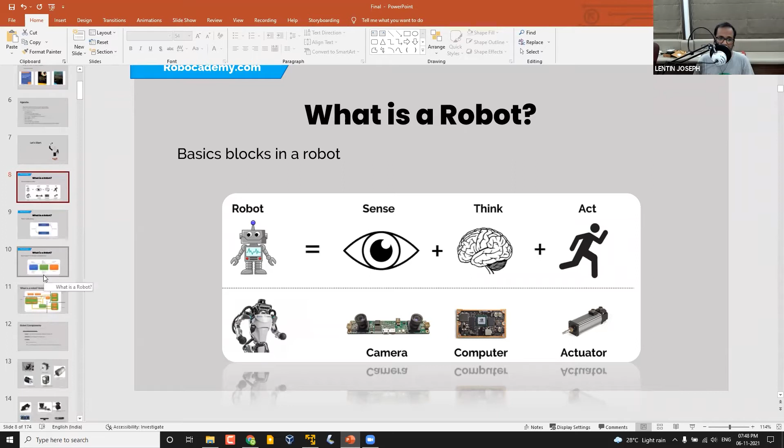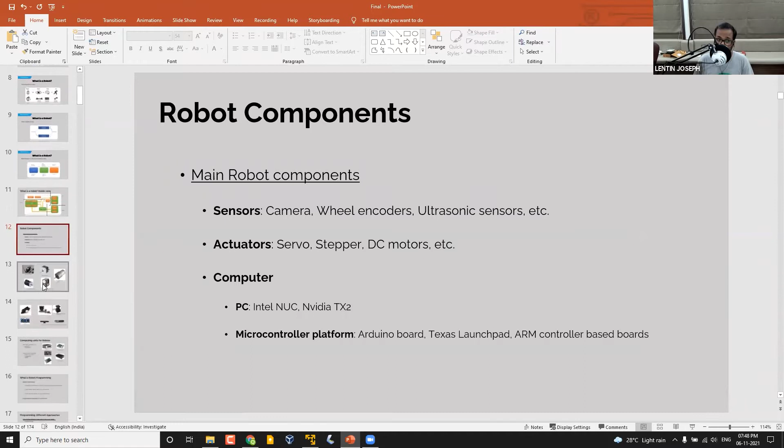Then I showed some very basic examples of the sense, think, and act loop using an obstacle avoidance robot. Then we discussed various components of a robot. These are not very deep topics — it's designed for absolute beginners. I didn't discuss any math or anything that needs more time. So this is a very basic idea.

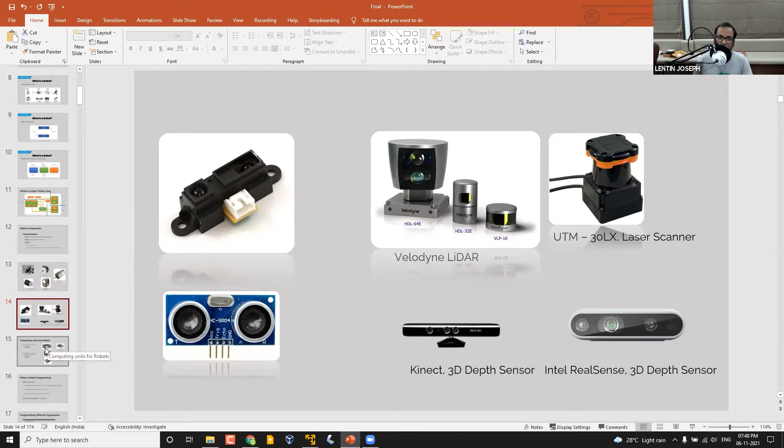And these are some of the components, like actuators, sensors, and computers. And I'll say in humans, the most differentiating factor is our intelligence — how we use it, that makes the difference, right? Maybe those who have the same IQ are using it better than us. So that's actually making us different, right? So in robotics, or in a robot, that is the differentiating factor.

What is the program running on the robot that makes it intelligent? If you run a basic program on a complex robot, it will only work in a very basic format. But if we put complex or very intelligent software in a complex robot, it will work intelligently. So the main stuff in robots is in the software. Other things are important too, but I will say the most important part is in the software.

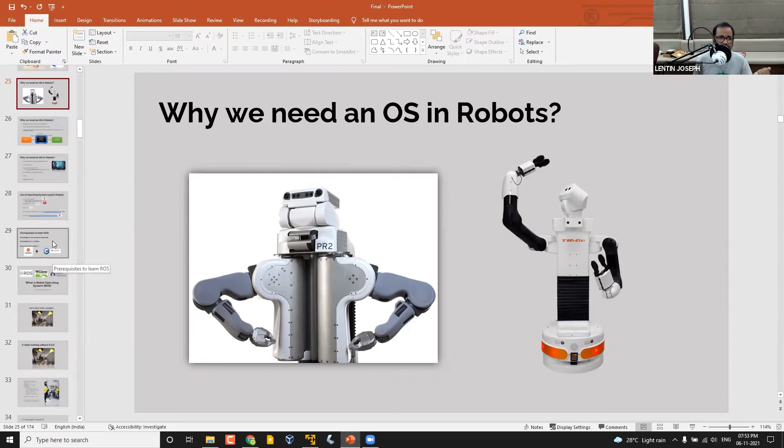So then we just started with ROS. We have also seen what different operating systems we use in robots, mainly Linux-based. And I mentioned that ROS is for programming robots - it's a software framework or software tool to create applications for robots.

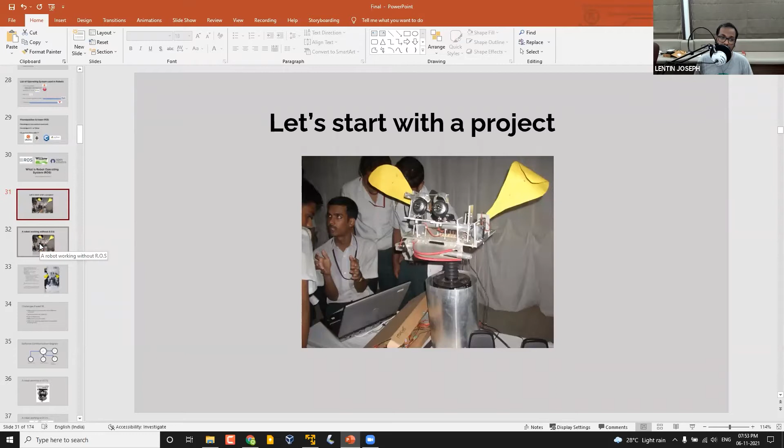Then we started with ROS. Then I showed my bachelor's project - this is how I started with robotics. It's a social robot, but I didn't use ROS at that time. I was not aware; it was happening in 2010 actually. But I implemented a similar setup - kind of a message passing interface using server and client. So that is actually where we use ROS for communication, which I will discuss.

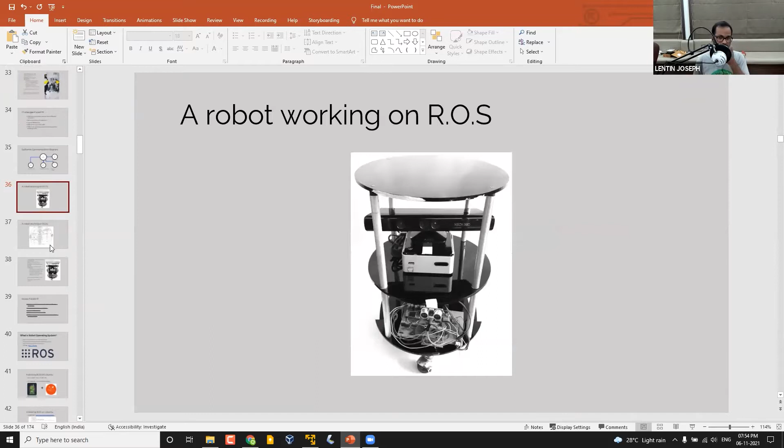So this was a start. Then I also showed a project that is using ROS, working using ROS. Then we started with ROS.

ROS stands for Robot Operating System, so you may think it's a real operating system, but basically it's not. We are calling it a meta operating system. There are many definitions for ROS - we can call it a meta operating system, a software tool, a software framework, or a communication middleware. All these definitions are suitable for ROS.

And I have shown the official website of ROS. This is the new website of ROS, so you can have a look at this website. I will be addressing your comments after some time.

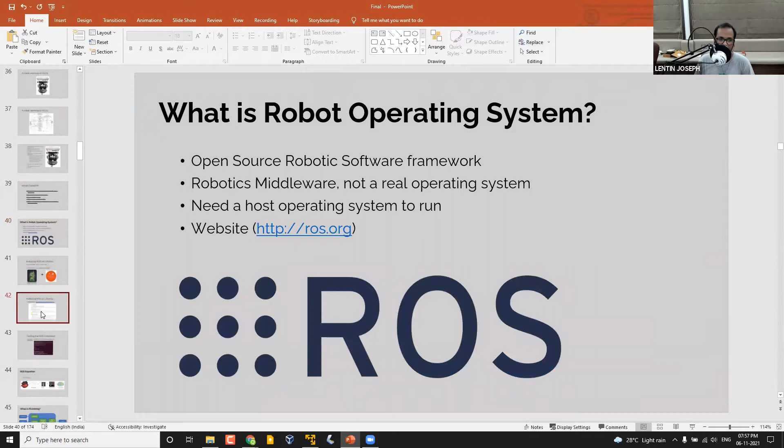Then we have discussed the basics of ROS. So from here, we will switch into our today's topic. ROS is basically having four main parts: one is the plumbing, second is tools and capabilities, and ecosystem. So you will obviously have confusion, right? I can explain these things, and today's topic is actually one of the topics from the capabilities. So we can just check what these four things are. First we can check what is plumbing.

I just want to ask you a question: how many of you created a robot using a Raspberry Pi, or with a laptop? A robot which is having a computer like Raspberry Pi or a laptop or anything. How many of you? With Raspberry Pi you have that. Great. Anyone? Okay, yes, some of you created. Good. Yes, okay, that's great. I didn't expect this much of people. So some of you have created robots using Arduino. That's also good.

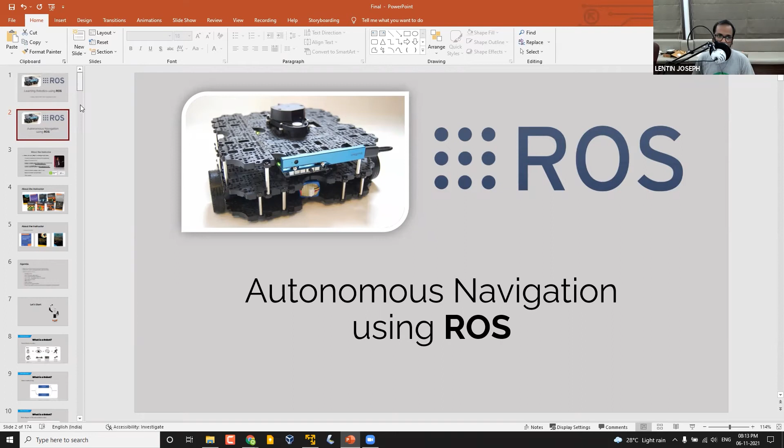One of the main reasons why people choose ROS is because of the capabilities. So what are capabilities? That is what I'm planning to focus on in this session. Capabilities are like - we already saw that we can write multiple nodes to accomplish a big task. The capabilities are some big tasks which are accomplished by some existing nodes already written by some people. There are some existing programs there, and we can simply take that program and fine-tune it, then we can do a big task. If you have confusion, I can show you different capabilities of ROS - this is the main reason people think of taking ROS for their project.

For example, if you want to implement autonomous navigation in robots - autonomous navigation, I already explained, going from A to B without any manual intervention - it can avoid obstacles automatically like this. You can see this video, right? Yesterday I showed this video, so this is the topic for today - we are planning to discuss about it. This is a very important and popular topic in ROS, and a lot of people, including me, are mainly interested in navigation.

Navigation algorithms in robotics - I am very passionate in working with these kind of things.

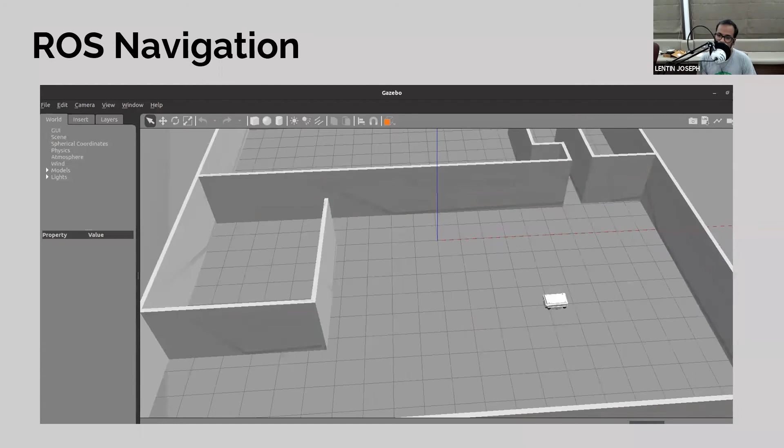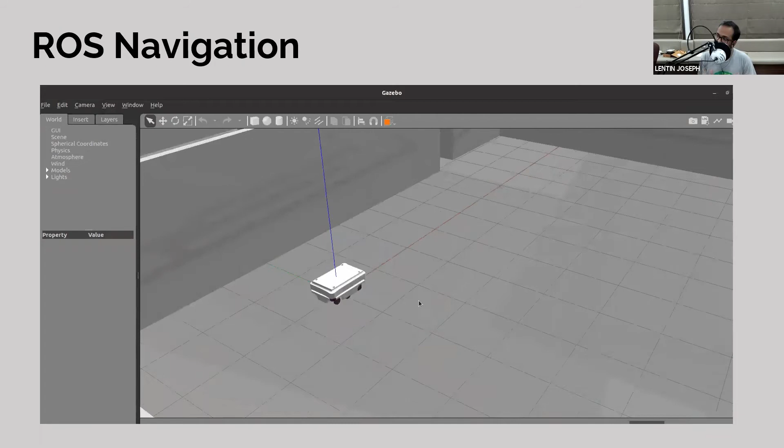Using ROS capabilities, you don't need to write any code. You can simply take the existing set of programs, or packages. Packages is a word we use in ROS - it's a collection of programs, and a collection of packages is called a stack. So navigation, in ROS there is a thing called the navigation stack, which is a collection of ROS packages that helps the robot do autonomous navigation without much programming. It's all about fine tuning the parameters, and you can do this kind of project both in simulation and on the real robot.

So this is the topic for today - one of the very popular capabilities in ROS. Other capabilities are manipulation, pick and place - taking an object from one place to another. You can easily implement pick and place routines. If you've heard about inverse kinematics, forward kinematics, motion planning - all these are available in ROS in the form of packages. You can simply take that, then configure it. It's not programming, it's configuring - simply adjusting the parameters, and then it's ready to go.

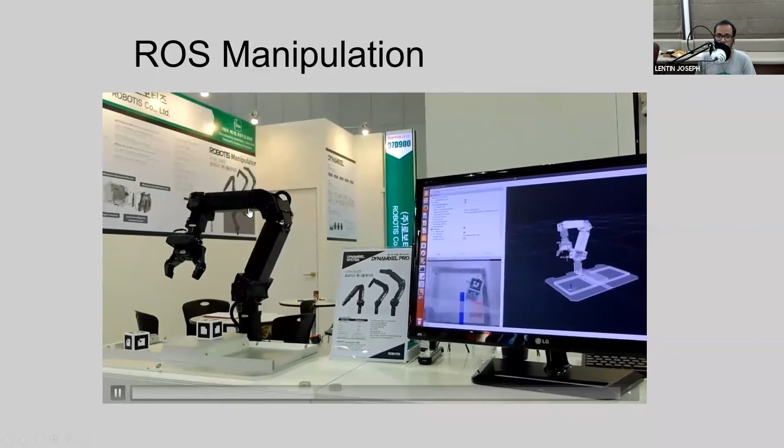So you are seeing a real robot demo. You can work with simulation and also real robot. The third capability is perception.

I think you heard about the self-driving car - it's a robotic car, it's a robot actually. There is a sensor on top of the car called a LiDAR, a 3D LiDAR. This demo is a mapping demo using self-driving car LiDAR data. So this kind of mapping and navigation can be implemented in your robot without much programming - I will say without any programming.

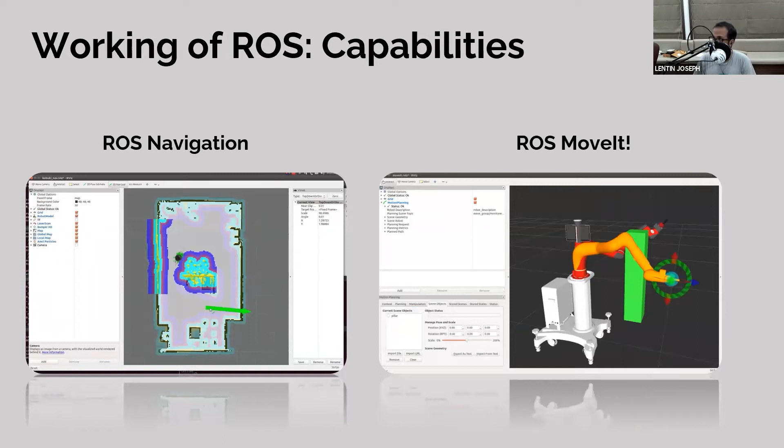So this is one of the attractive features in ROS - existing code that you can just reuse. There are many packages available in ROS, you can simply reuse the code. So let's dive into ROS navigation.

I'm just switching to a web-based tutorial now. I can give you a link first - I'm using the ROS website link, so you can also follow. I've put a link on the chat box - this is that link. You can take that, and this is the wiki page of the navigation stack that I mentioned.

Navigation stack - so what is a stack? It's a collection of packages. Here, navigation stack is a collection of packages in order to do autonomous navigation, so we can simply take and customize it for our robot. You can just see a comic here.

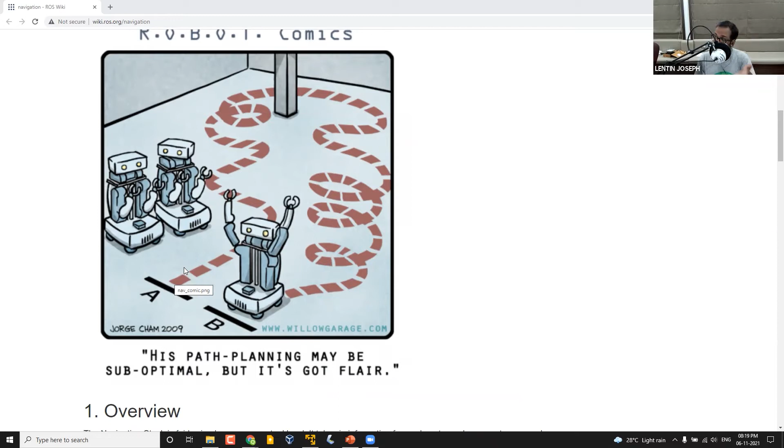The objective of this set of packages is mainly going from A to B. If there is an obstacle or anything, using the navigation stack the robot can avoid it using its sensors, and then it can reach the goal.

There is an interesting video attached to the same page, which is the official video of the navigation stack. It's somewhat old, but still relevant.

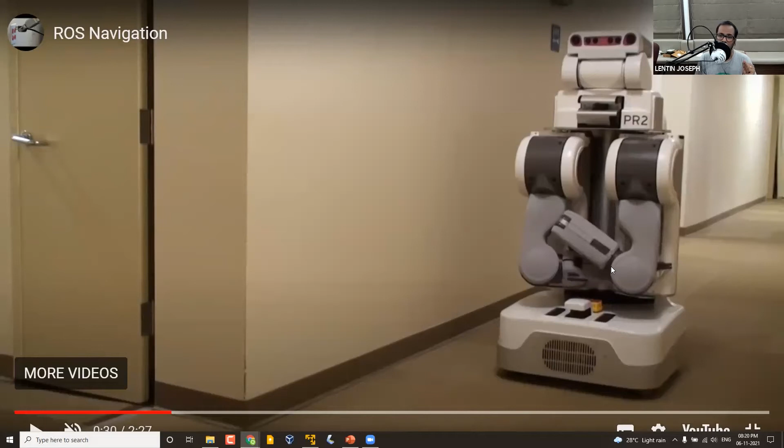You can see some of the things from the navigation stack - using the navigation stack, you can take the data from the LiDAR or laser scan. This robot is called PR2, one of the older robots. Actually, you can see a lot of demos using PR2 and ROS on YouTube.

So here the robot is moving based on the navigation stack. I'm just showing a demo first, then I will explain what the navigation stack is. So here you can see the robot - this is a visualization.

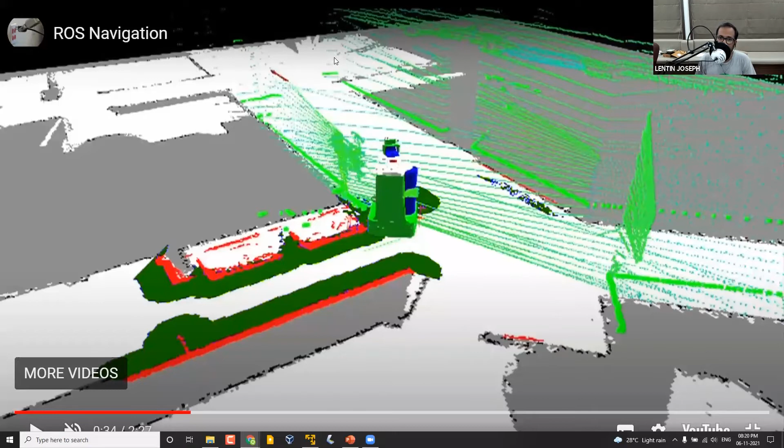Okay, this is a visualization, and you can see on the bottom there is a map. There is a map, and you can also see a LiDAR. Actually, you have seen in the chest there is a LiDAR, it's moving like this, right? So when the robot moves, you can see there is a red arrow here, right?

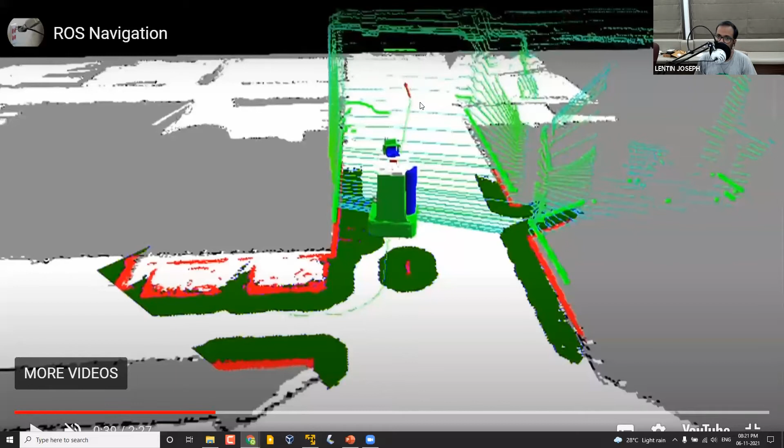That is the goal position that they have given. So the robot is actually planning a path, and it's avoiding these walls and reaching the goal, and this is obstacle avoidance. This feature is obstacle avoidance. It detected an obstacle, then immediately it stopped, then it rotated because it was confused about what happened. Then after that, it took a new position, a new route.

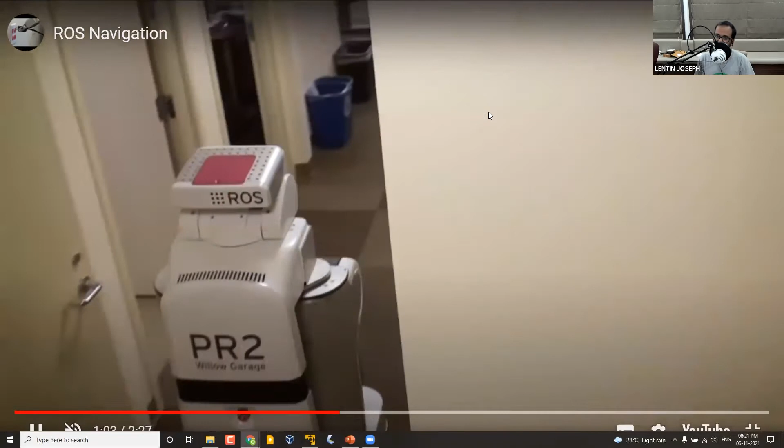So these are some interesting projects. There are many projects related to navigation on the web, and on YouTube also you can find many videos. So these are some of the primitive videos, but still it's good.

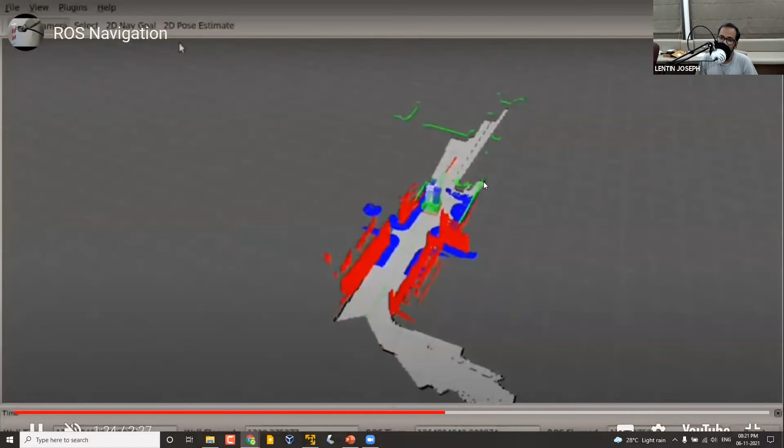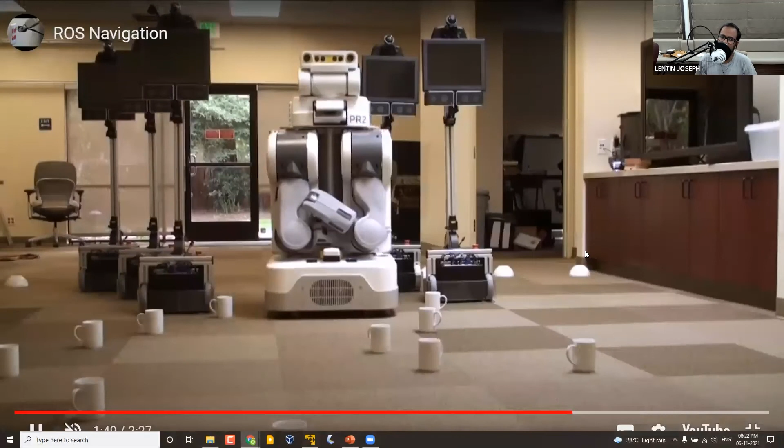So here you can see the robot is moving, and it's also creating a 3D map, and it's actually moving and also building a map. So kind of exploration. That also can be done using the navigation stack. Anything related to navigation can be accomplished using this set of packages called the navigation stack.

Basically, the ROS navigation stack is designed for 2D, meaning like in a plane, but we can fine tune it. We can tweak it for 3D as well, for aerial drones and all, we can use the navigation stack with some tweaking.

So this is a demo of the navigation stack, and then you can take this link, navigation stack setup. You can just take that. That actually shows what is inside the navigation stack and how the navigation stack works. So after discussing this, I will show you a simulation demo.

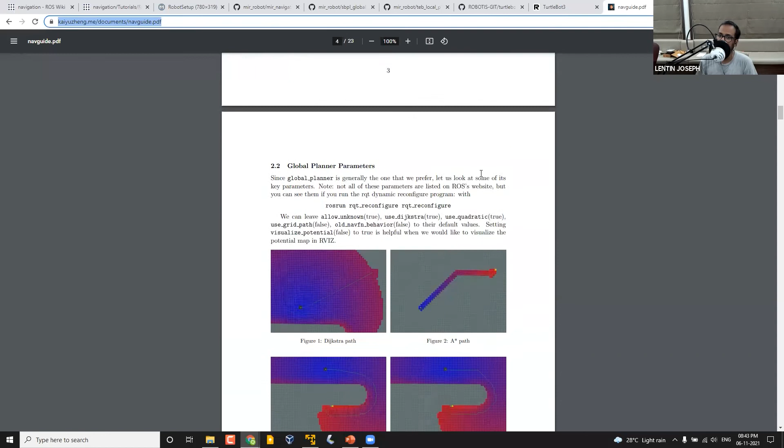Yeah, okay, so you can see that PDF, right? This is one of the simplest documents you can get from the web to fine tune these tons of parameters. Parameter fine tuning is not easy, it requires some experience. There are many parameters like move base parameters, some from the move base node, then costmap parameters, parameters of the global costmap. You have to fine tune all this. You can find the documentation of all these from the ROS Wiki.

For example, if you want to see the parameters of MoveBase, you can just click here and you can see the parameters from MoveBase - these are the parameters. You can see the ROS parameters. You can put in the MoveBase parameters - you can give the global planner, local planner, recovery behavior, all that stuff.

Okay, so it's not a simple topic. It needs a lot of learning. It will take some time to learn all this stuff, but I'm trying to give an abstract of what the ROS navigation stack is and how we can start with it. There are some books of mine that are also helpful, like the latest book, Mastering ROS for Robotics Programming, 3rd edition, which explains it in detail.

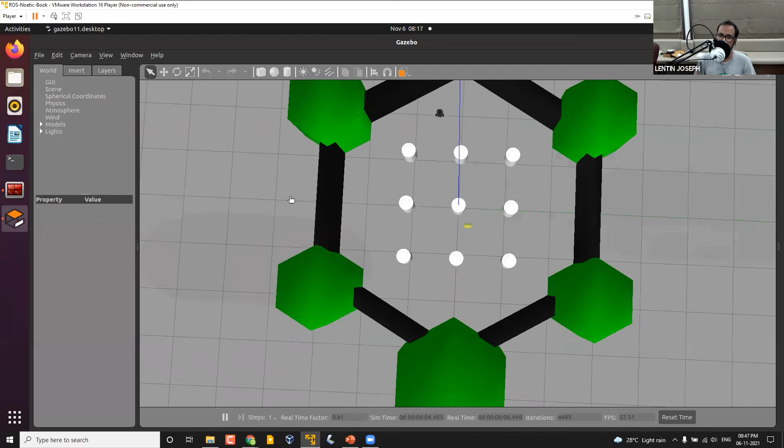Also sir, I have right now Pluto X, Pluto 1.2. I have installed the package for camera calibration and for its command. I am trying to do SLAM using monocular SLAM, but I'm stuck there also. After getting the map, what will you suggest for autonomous navigation?

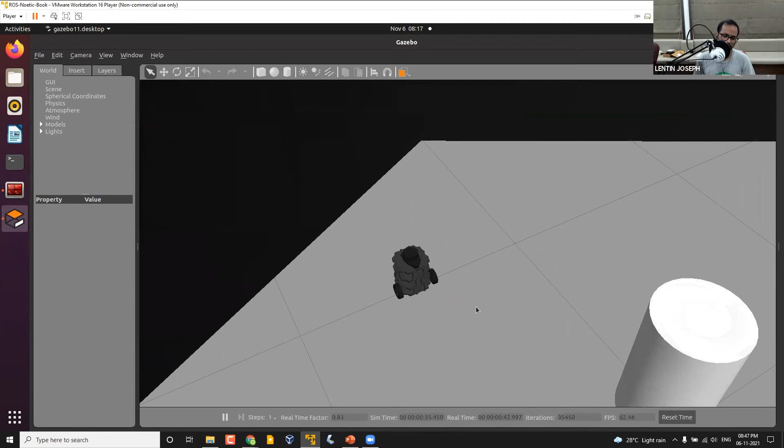Like what package? So did you check ORB SLAM? Yes, I checked, I have checked. But I guess I'm stuck between the topic name, I guess, but I'm working on it. ORB SLAM is actually good. I'm not saying it's perfect or accurate, but we can use the monocular cam to do the mapping.

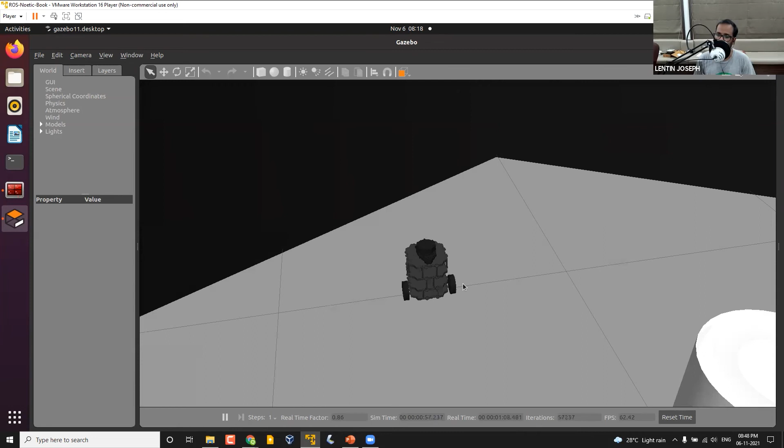But using that, or RTAB - did you try RTAB? No sir, RTAB I think is also a visual SLAM technique you can use. But for the ROS navigation stack, I think we need a map, a 2D map, and these sensors to navigate. But if you're not planning to work with the navigation stack, then there are other things like Hector mapping, but it may need laser scan, I guess. I think ORB or RTAB - there's one more thing I worked with - these will be helpful, but I'm not sure about the accuracy of the navigation. I'm not sure it's accurate, but working with the navigation stack will be accurate.

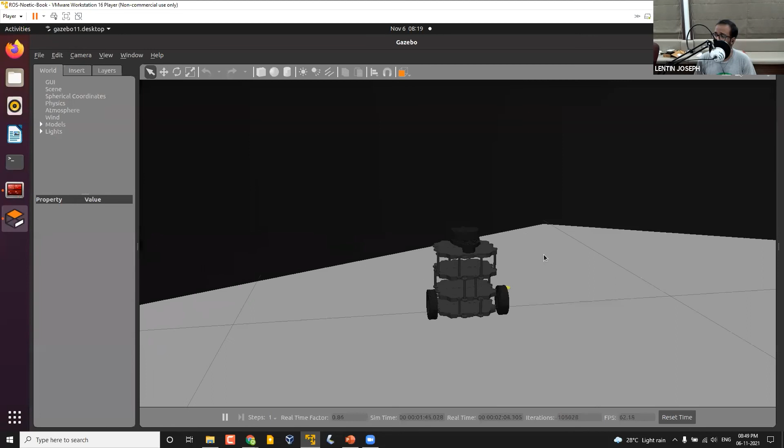But are you planning to connect any laser or something into the robot? Not yet sir, but if possible I will attach it. Since it is a drone, we need to take the weight into consideration. So in that case, I think there is a monocular SLAM from Technical University of Munich. There are many options, maybe I can share. It's actually an old package.

You can search for TUM ROS. It's for the Parrot drone, I think. Maybe I can share it, you can try that. It's actually using the monocular cam. I think that will be helpful. So there are many packages for doing this, but the accuracy is one issue. You can try - you can just iterate through some of these packages and then I think you can choose one from that.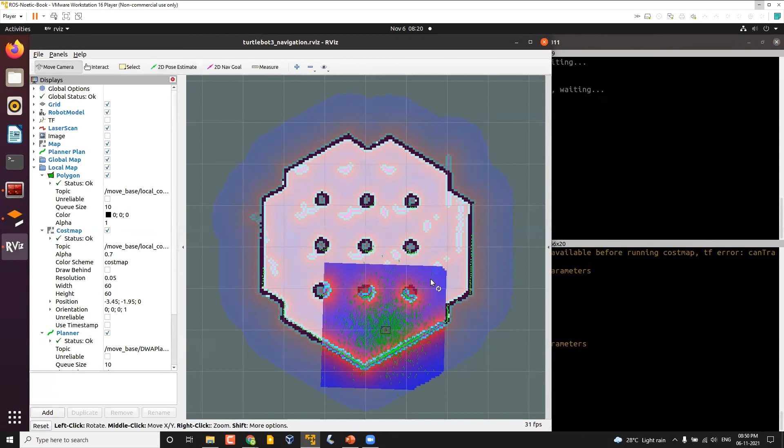Also sir, since we're talking about navigation - to calibrate this with a real robot, like in simulation we can easily do the navigation, but to do it on a real robot, how should we connect the nodes to the real robot actuator? In case of the navigation stack, if you're using the navigation stack, the only thing is that if you can provide these topics like ODOM, then TF, then the map, then the sensors, that is actually fine for working with the navigation stack.

If you want to compute the odometry, you should use the encoder data, or laser odometry, or visual odometry to get the odometry. This is actually important when you work with a real robot - you have to calculate the odometry value, that's one of the important parts. After getting the odometry, if you connect a laser scan, I think it's ready to go. There is not much work involved.

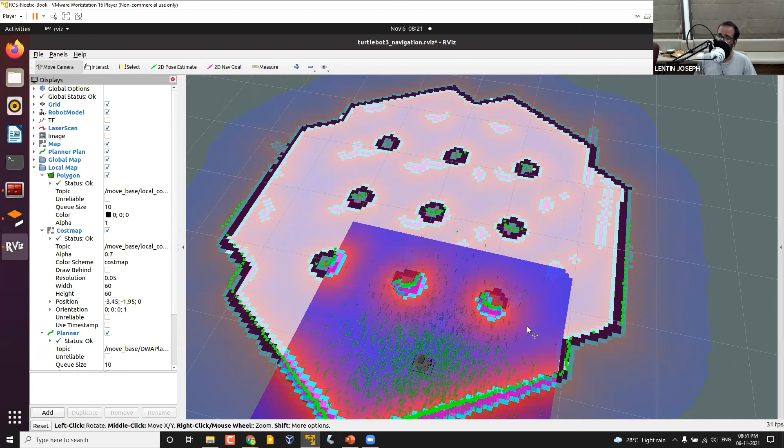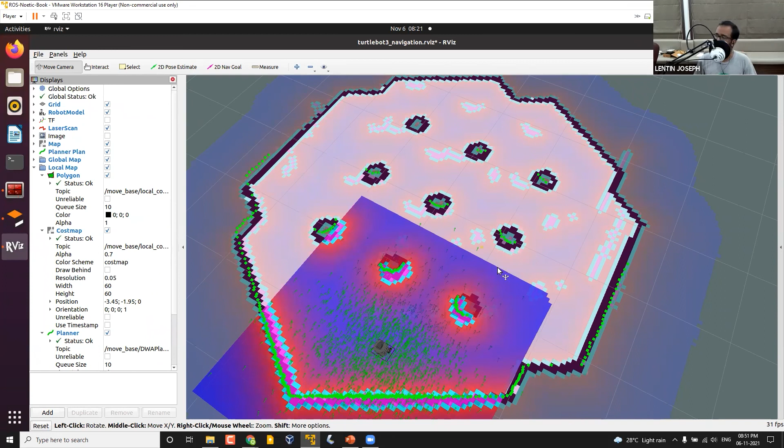But in order to read from the encoder, you have to connect an Arduino board into the robot. You can count the number of ticks from the encoder, then compute the odometry data, then send it into the ROS navigation stack. So there is some work involved, but I think I have sent the Turtlebot 3 and diffbot references, right?

I think the Turtlebot 3 is one of the references you can take to see how to proceed, and there are many other references. This is from one of my courses, and it's also mentioned in my book. I'm actually running a course in ROS called ROS Developer Learning Path. This is one of the projects that one of my team members did, and it's already included in my latest book. I think this will be a good reference for you to start with navigation stack, simulation, and then how to put it into actual hardware - how to integrate everything.

And also the Linorobot project, which is again from one of my friends. This project is very popular, and he also ported it into ROS 2. So these are the two projects that you can refer to.

Can you tell about the TF? What is the significance of it?

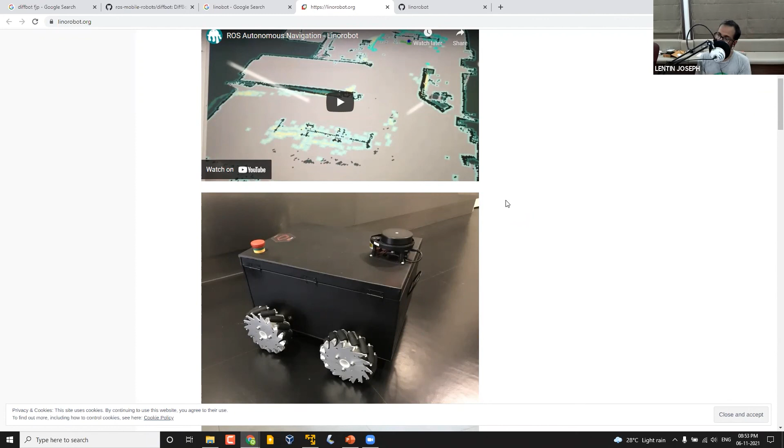TF is actually the transformation. If you take a robot, there are wheels, then there are sensors, right? Sensors may be mounted on the robot. So the TF is the transform from the base of the robot - from the base of the robot, what is the distance of the wheel, what is the orientation of the wheel, what is the height of the LiDAR mounted. All this stuff.

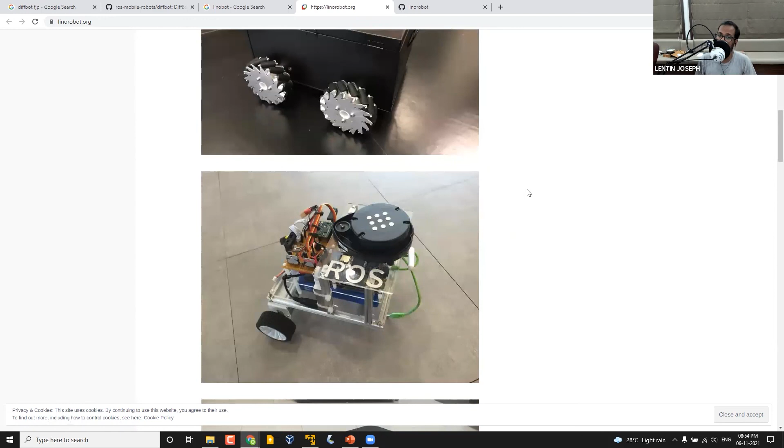That is actually TF, and the TF can be published by ourselves or using a robot model called URDF. In ROS, there is a thing called URDF, so you can use that also for publishing the transformation. It's not very difficult.

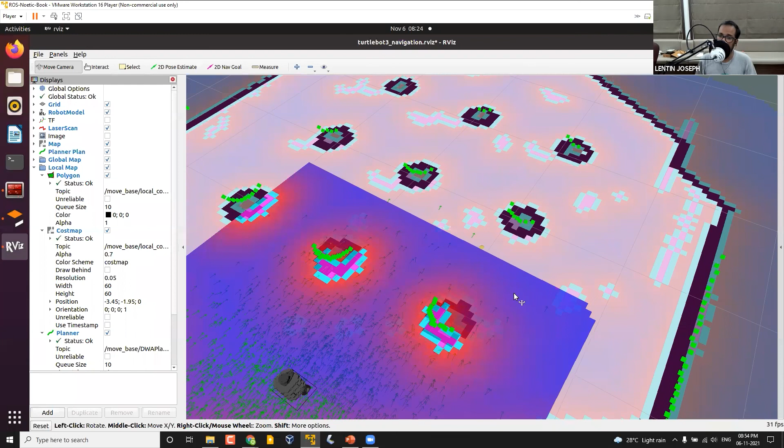These projects will be helpful to start working on some real robots. What I'm showing here is a simulation of a robot called Turtlebot 3. If you give a goal position like this, the robot is planning a path. This is happening not only in the simulation, you can implement the same in the actual hardware.

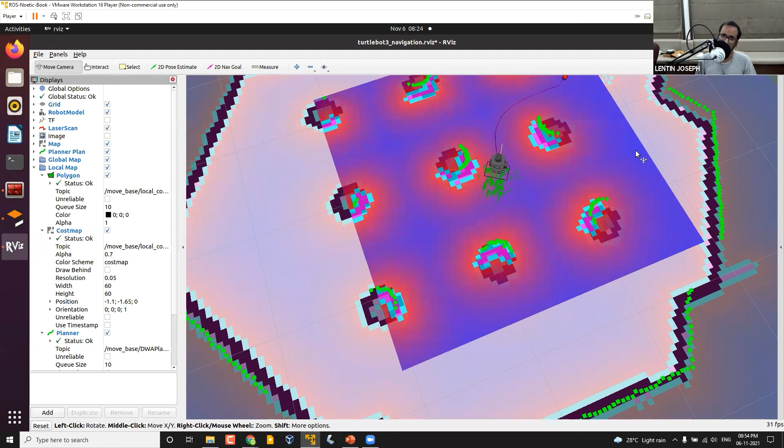I'm taking one more question - which ROS is more suitable for industrial deployment, ROS 1 or ROS 2? Again, a relevant question. ROS 1 currently is very stable. ROS 2 is actually product ready, but I will not say it is as stable as ROS 1. So it's actually a bit of a difficult choice, and it will be based on your application as well.

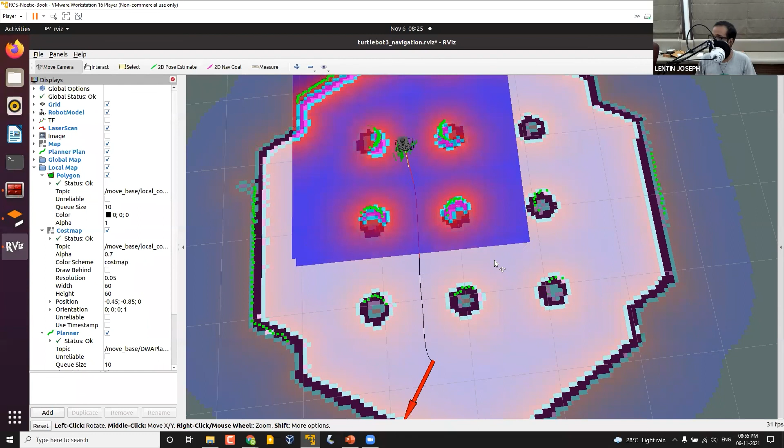If you are planning to do navigation or something, there is Navigation 2, for ROS 2. I will say it's much better. It's still in development, but it's in a good position, so you can rely on this nav stack now and develop.

But if you are planning to explore the entire possibility of ROS, like all the packages of ROS, then ROS 2 will not be an option, because the packages are still porting from ROS 1 to ROS 2. So it's actually a bit of a difficult decision, and it will depend on the applications that you are going to do.

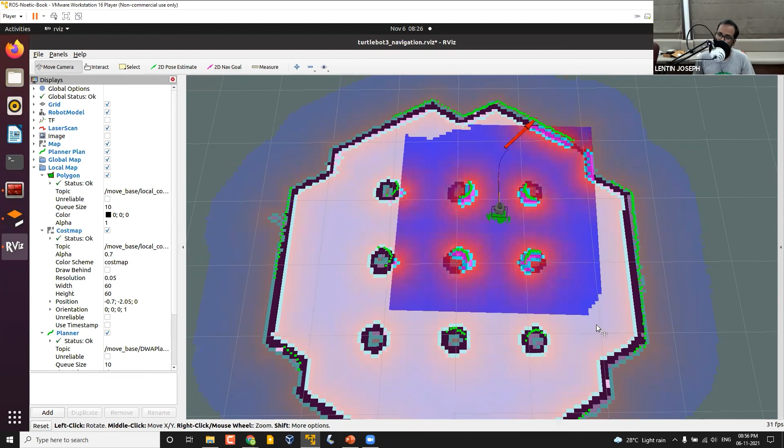But as per the design, I will say ROS 2 is for the product. ROS 1 is mainly for research, but it can be used for product with a lot of fine tuning. We are running out of time now.

Have you worked on unmanned surface robot boats? I have very little experience working with it in simulation. There are some ROS stacks available to work with boats. Then you know about omnidirectional robots with the navigation stack? Yes, omnidirectional - you can refer to the Linorobot project I have done, which has an omnidirectional robot as well.

What is the difference between TF message and odometry message? The odometry is actually publishing the current robot position. TF is the transform - meaning the position and orientation of a link of the robot with respect to one fixed frame. So it's all about the frame, like there will be a wheel frame, a sensor frame, and so on.

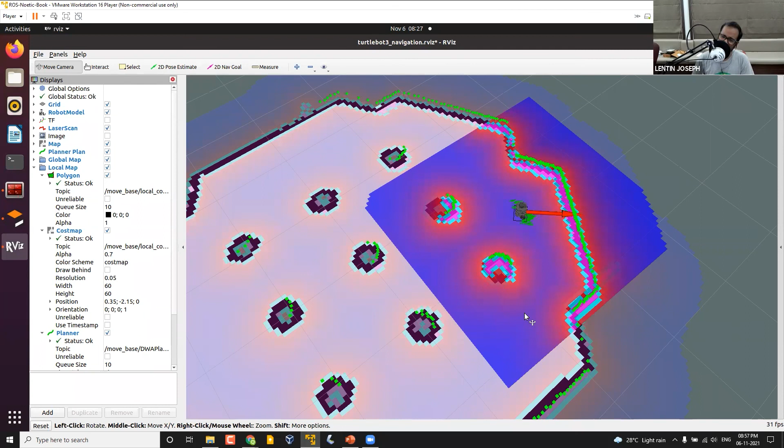I think it will take some time to digest all this stuff. It will be better to start with ROS, then only you can understand, because we have a lot of limitations in this talk - this is a very, very big topic.

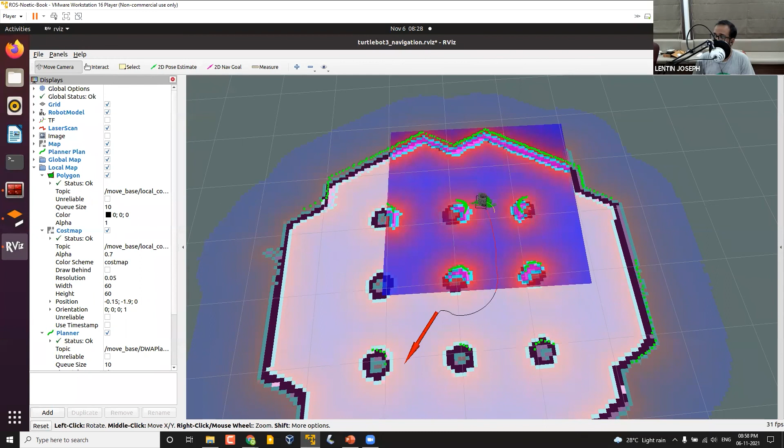I'm planning on making my own robot on ROS and applying the navigation stack. Is there any reference design for the robot mechanics? Yes, the links that I have given are actually very useful - the Linorobot, DiffBot, and everything.

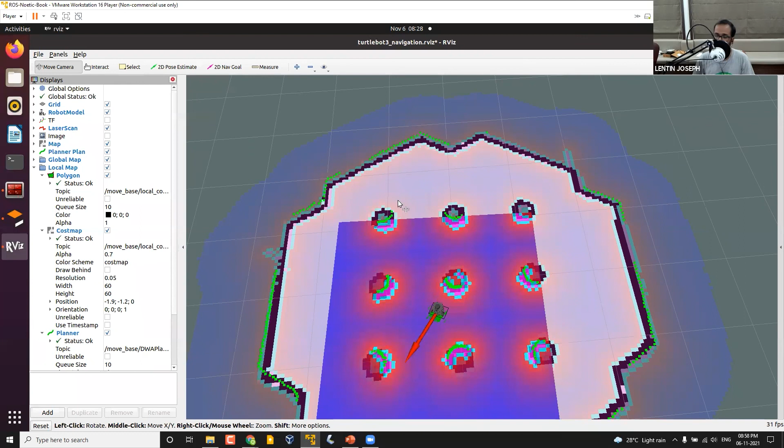So this is the ROS navigation stack. We can give a goal position, and the robot is actually moving in the simulation. What we are seeing here is a visualization of the map and everything. The simulated robot is moving, and if we have a real robot, it will move like that.